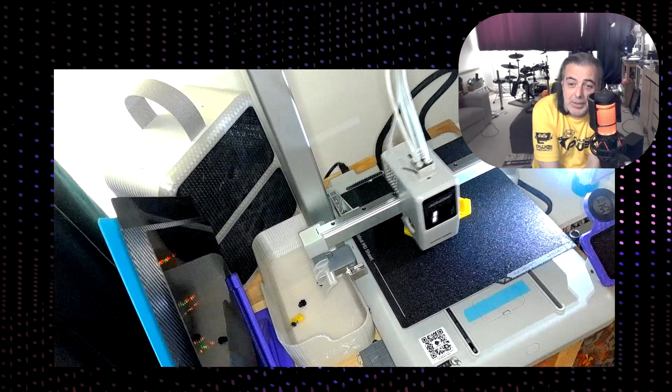So another day, another update on the Poppiescaster. What you can see right now is I am printing a pretty yellow magnetic drawer for plectrums.

It's an idea I had, but it turned out someone else had already designed one, so that saved a bit of time. That's one of the things I really like about the 3D printing community, the way people customise other designs. If you look in that white tub to the side of the printer, you'll see the printer poop.

The reason I'm printing things that you really don't add until the very end is because you have to check that they fit. I have never printed this drawer before. I'm printing it in yellow because I'm hoping that maybe this will just fit and won't need to be reprinted.

You might see on the one on the left, that's a hole where a 7mm by 3mm magnet will go. Hopefully that will help to hold it in.

One thing I hadn't considered at the start of the project was how I might want to hold the guitar together. Full screen, as you can see, there are two holes there. There are a selection of holes here, but really the two big holes on that side are for the wiring to come through from the core.

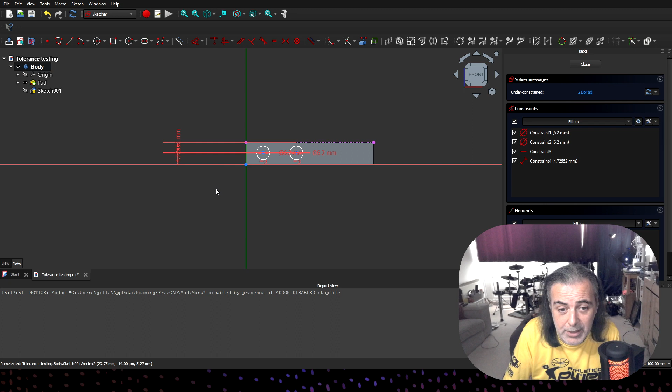Now we already know that block is 10mm, so let's just put it bang in the middle at 5mm. So let's do that for the end as well. So let's go back to getting external geometry.

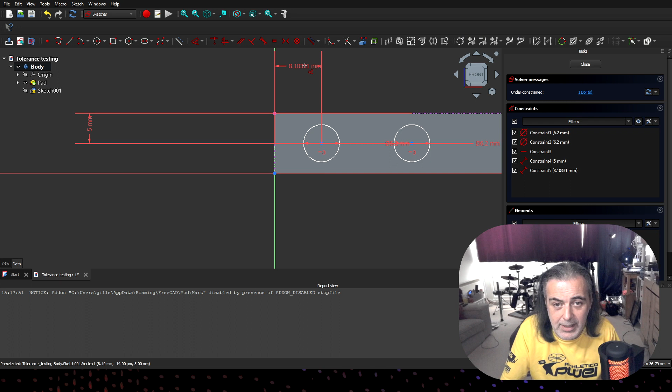We don't actually need to get external geometry because we do actually have this center line, but we select here, select the first circle, press D, and that's 8.1mm away at the moment, so let's just tell it 5 as well, and that has moved.

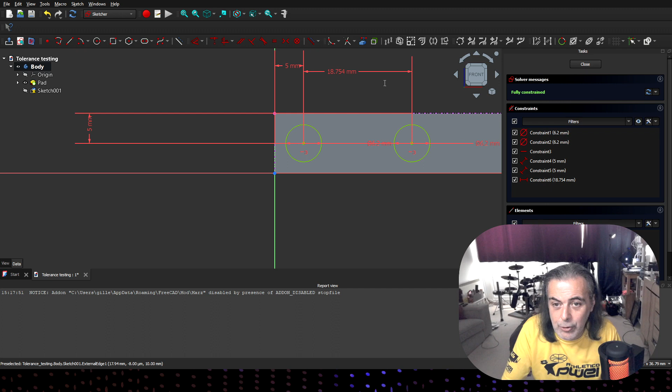Now we can select these two and press D, and I want to make the distance between them not 25, 15. Actually no, we will do 25 because we want to make sure that everything fits, and that seems like an easy way to do that.

So now that we have designed those two holes and they are 5mm from here and 5mm from here. Obviously they are also going to be 5mm from there, but we don't have to tell it that.

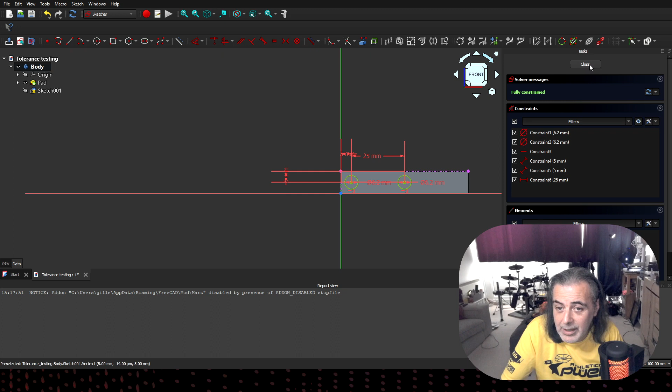We can close that sketch, and now we are going to add a pocket. Now that said 12mm, and I made the diameter 6.2. I'm going to make the depth 6.3. I don't know why, it just seems like a good amount to me.

0.3 of a millimetre is a tiny amount, but also if I'm going to add any glue, maybe 0.3 millimetres of glue will do. So, there we have them.

Now I would like to add 2 holes for checking the hole size for the heat inserts. So pick this face again, create a sketch, pick our circle. Now the calipers tell me that the bit that fits in, the bit that seats in, is exactly 4mm.

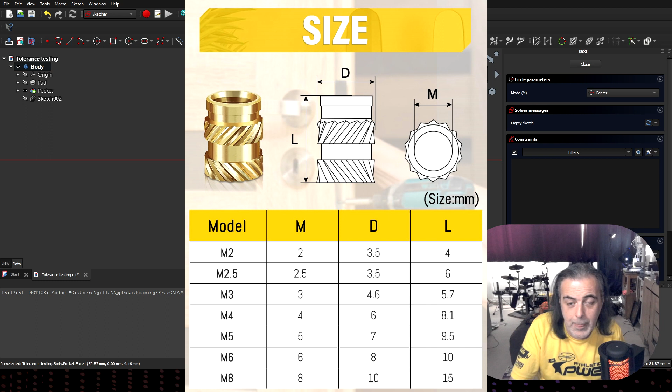And the very top, where it will engage with the surface, that is 4.6mm. So I'm going to say 4.2 for the width for that one, and then the one beside it I'm going to put 4.3. Now we'll know that the one closest to the pegs is 4.2, the one farthest away is 4.3.

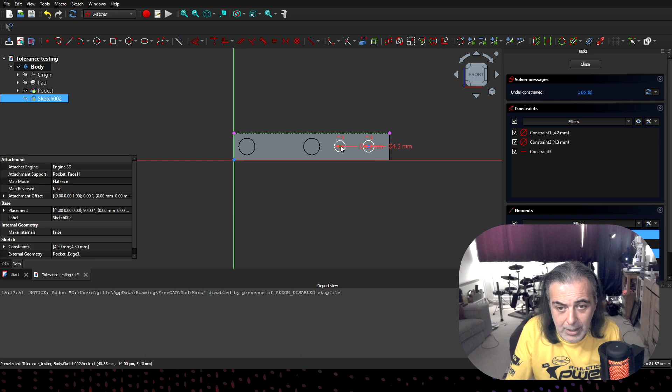And while we are here, we may as well constrain these. So constrain them horizontally first, and now D for distance, and we will make them exactly in the centre as well.

I'm not too fussed about the distance between them, but also when you have selected a tool, just right click to close that selection. So, 11, let's go with 15.

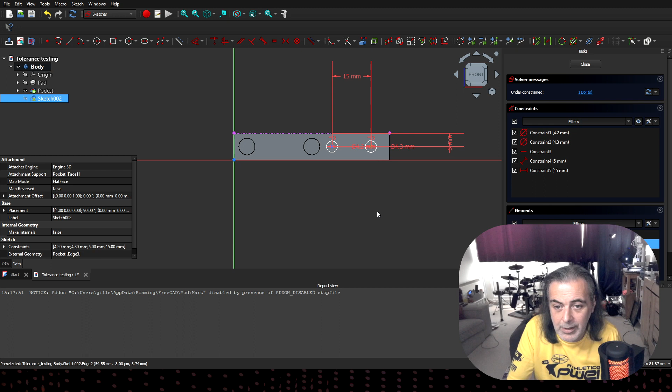Let us select the geometry for the end, right click to get out of that, select that, D, and we will make that 5mm as well, because that seems fair. Now those 2 holes are fully constrained. It is time to decide what depth.

It says 5.6, so let's just go with 5.6 and see how we get on. What we're going to do is create another body and create another sketch, also along the same XY plane.

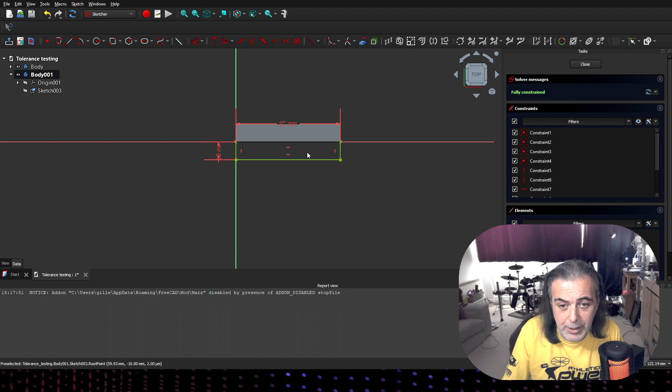Now I am getting the rectangle tool out again, locking it to that center point and going for 60 by 10. Again, as you can see, it's green because it's fully constrained. Right click to get out of that, then close the sketch and pad to 10mm.

What I'm doing is I go up here and click on that eye. I've made the second body disappear because I want to select this face, come up here to the part design menu and create a shape binder.

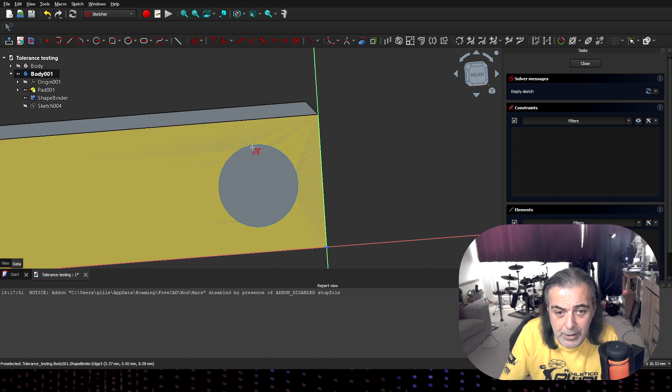External geometry, and zoom in so that I'm just getting this line, then there we go. That gives me the center point for all of these holes, which is going to be quite important in a wee minute.

Very Scottish there, wasn't I?

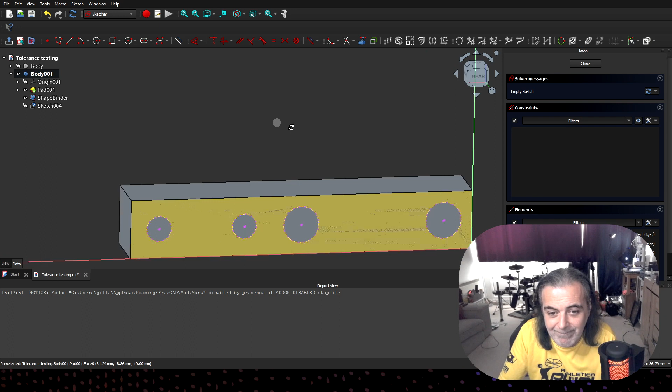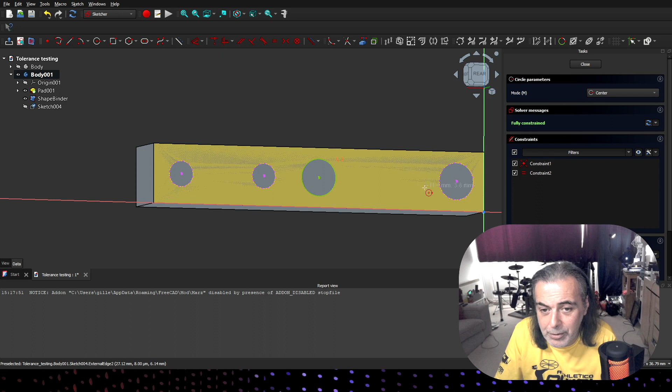So first we're going to do the big holes, and if we drag out, we will see that little icon appear when we get to 6.2. There we go. So click on the center point again, drag it out, 6.2, and that's fully constrained. So close that. Pocket, that was 6.3.

And that's those complete. Now, on this side of what we're making, we actually want to remove quite a few mil. Pick the face that I want, which is this face here. Get our rectangle tool. Let's make that 25.

But then for this side, we only want to leave 2 mil, and we know that it's 10, so we'll make that 8. Now when we close out of this sketch and make a pocket, we will select that the pocket is 10 mil, and there we go. On this side...

Which you'll be thinking, oh, you can't see your shape binder now. Well, if I select on this and toggle transparency, then yes, I can.

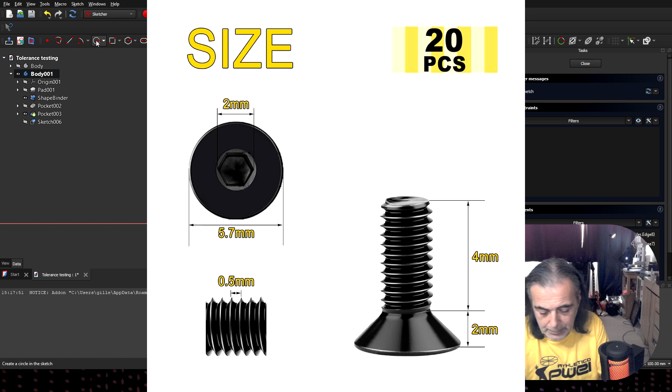So what we are going to do with this is we're just going to make a 3 mil circle, 3 mil, click here, 3 mil.

Now when we close the sketch this time, we're not going to add a pocket, we're going to add a hole. So when we click on hole here, we can go to this ISO metric regular profile, which is what I've been using. If anyone has better experience of hole tools...

Now it says, lets us pick the size here. M3. We'll go with wide clearance. It just makes it 3.6mm because 3D prints shrink as they cool, so it might seem like it's perfect, then cool down and not be perfect at all.

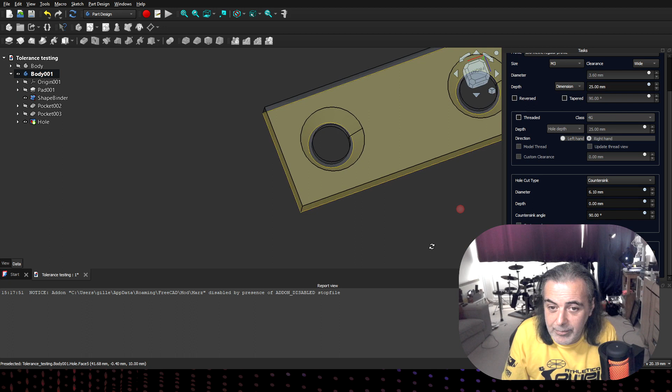So for the hole cut type, countersink. There we go. Let's just zoom in a bit. Let me just check. It says the diameter of that is 6.10.

So let me check the diameter of one of these screws. Yeah, that says 5.7. This is why we're doing this, because it will make everything easier if we know what we're doing at the end before we even get there. So let us make the diameter 7.2.

And we bring our other body back. We can see right through our screw holes.

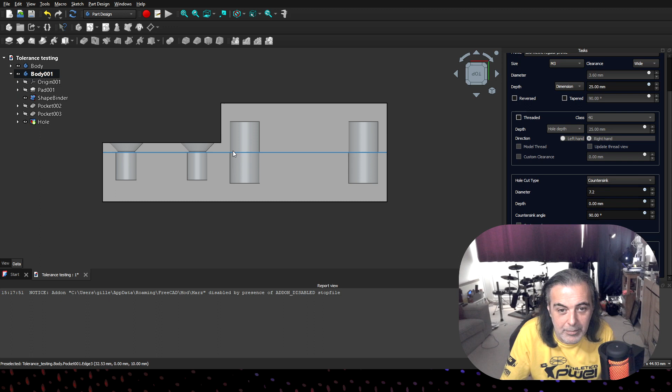So that is what we have created. Now if I select this here, which was the last operation carried out... oh wait a minute, we have not clicked OK. Silly me. So now that we have clicked OK and everything is done.

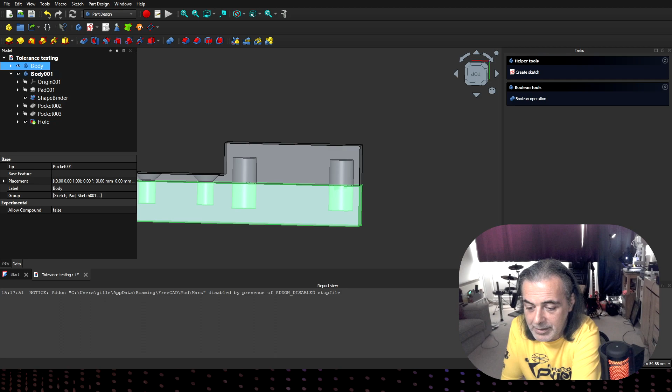Let us then export this as an STL. The drawer still has about a quarter of an hour to go, so we'll let that finish and then come back and print out these parts in black and have a look at whether they are the sizes required.

It has finished. You may notice that the inside of the drawer suffers from what they call stringing.

Okay, so we have the hexagon. I've brought over the small clip. Wait a minute, so this would be the front. So there we go, from the front, but from the back. And it is actually shaped for plectrums.

Although I do imagine that now, instead of people saying 'I'm trying to find my bloody plectrum, I had it a minute ago,' they were saying 'my magnetic drawer fell out my guitar.' Didn't hold them as expected.

I think what I might do is revise this and put little slats down at the bottom to grip each plectrum, or just put a little groove along every once in a while to grip them.

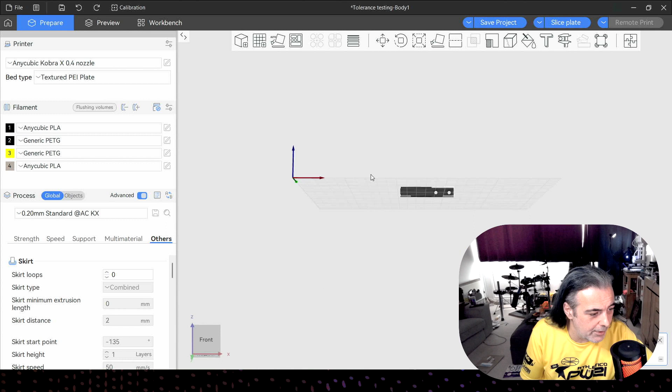We have our... oh, that is upside down, isn't it? Oh no, it's on its side. Which is actually how we want them to print.

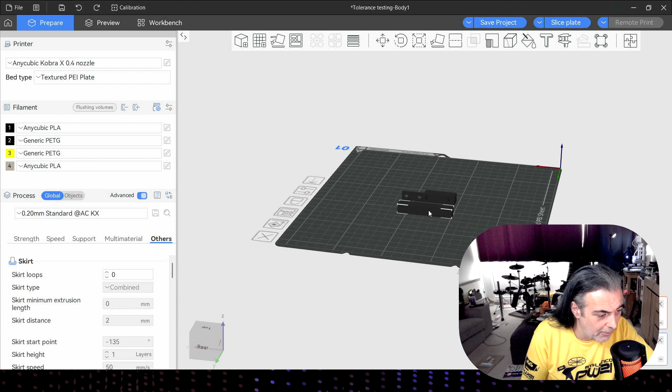Can anyone in the class remember why we want them to print like that? Okay, so yes, we're printing them on their side because that is how they will print when they're on the big pieces, based on how each section has to sit on the build plate.

For instance, this, some people would print this on the build plate like this, but I want to have it lying down.

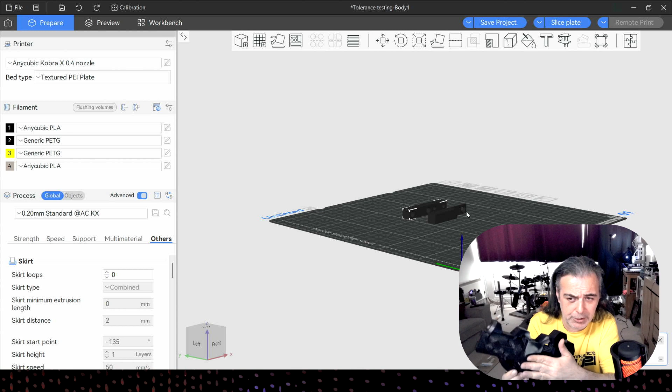Initially that was because I was going to use the holographic, but I have realised that perhaps due to not having an enclosure in the middle of the night, this would start to lift off the bed, off the build plate, and you might even be able to see it in the actual print itself.

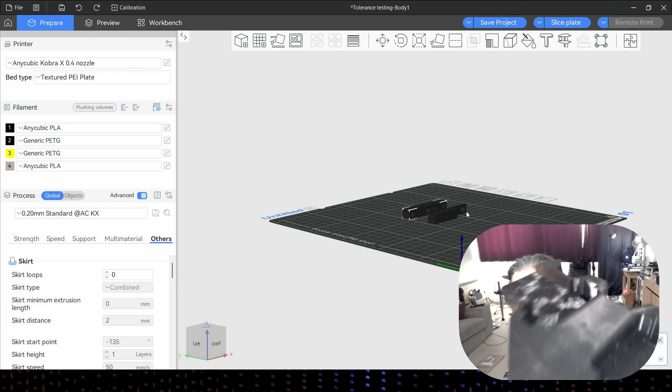You can see that there's a line here where that stayed stuck down to the bed, and everything outside of that line had actually lifted off the bed. So it is not actually flat.

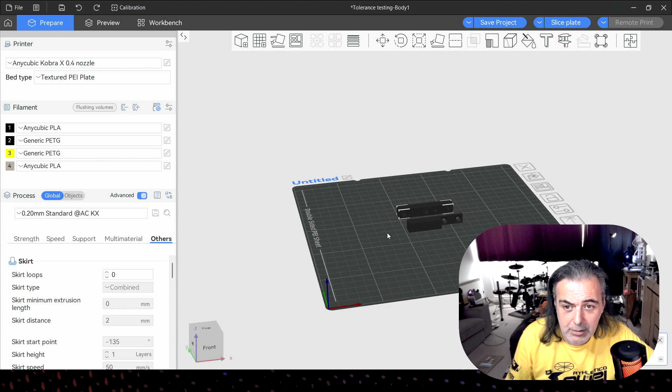This again, so we have our two tolerance testing bits. Let's go to the objects, and we don't actually want them to be printing in filament 1. We want them to be printing in filament 2, generic PETG.

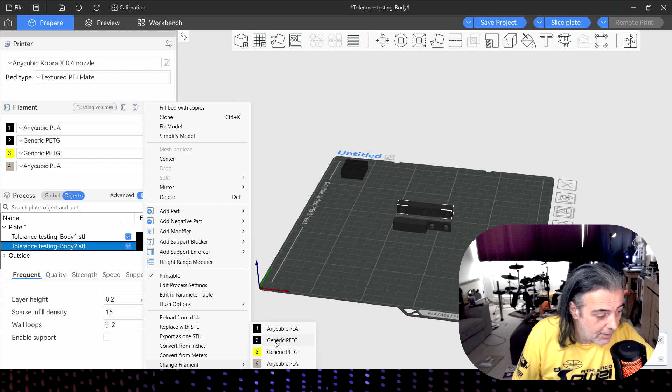So if we slice that, it should take 17 minutes to print. Don't really need to level the bed this time.

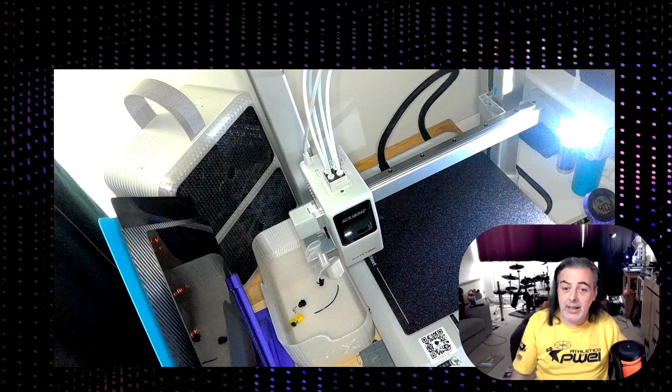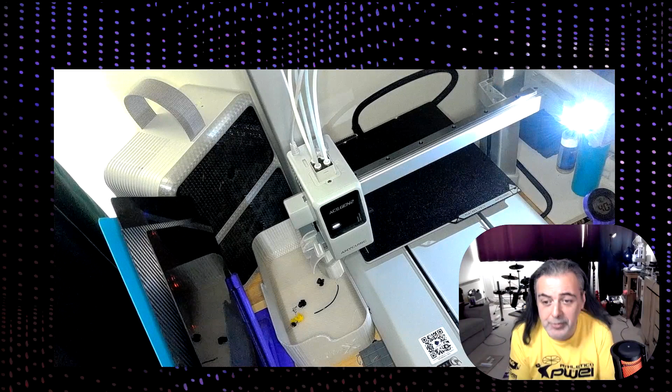And, oh! Seriously, I did not go and make a happy face in the poop tray. That sounds wrong. So just for anyone that's interested, that's the printer now received its instructions. It's switched on to filament 2, which is generic PETG, and it's now going to do a little poop, which will probably ruin the poop plate, or will it give it a nose?

I said I would edit this down, but I don't want to. This is fascinating. This is like an Attenborough documentary. Oh, right in the mouth.

So here we have the other bit. Yeah, that's pretty tight on there, and you can close it right down. So we know that each of these is 10 mil.

So now we know that seats together perfectly.

Right, so what I have noticed with this is that the one that I made, 4.3, seems more comfortable, but also seems too tight.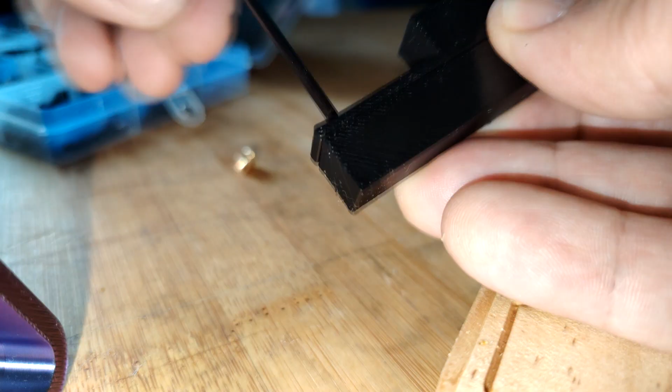So now we just have to see if the heat inserts line up with the bolts. And of course these are flat-headed hex key bolts. These particular ones are M3, and I believe they are 6mm in depth, so they go 2mm through and then 4mm into the heat insert.

And with the hex head, that might seem a bit unusual, but anyone who's ever tried to get a threaded screw head out of a guitar will know if you can make it a little bit easier, then that's just going to be even more helpful. Although it's quite difficult to use the hex key inside the hexagons. But essentially, about a dozen of these bolts and a dozen of these heat inserts will be holding the majority of the guitar together, along with some epoxy resin.

So here's our final piece, and as you can see, those bolts really do just sit nicely in those countersunk holes. That's a very handy feature in FreeCAD. And with the posts, the screws and epoxy resin, that should be a pretty solid held together guitar.